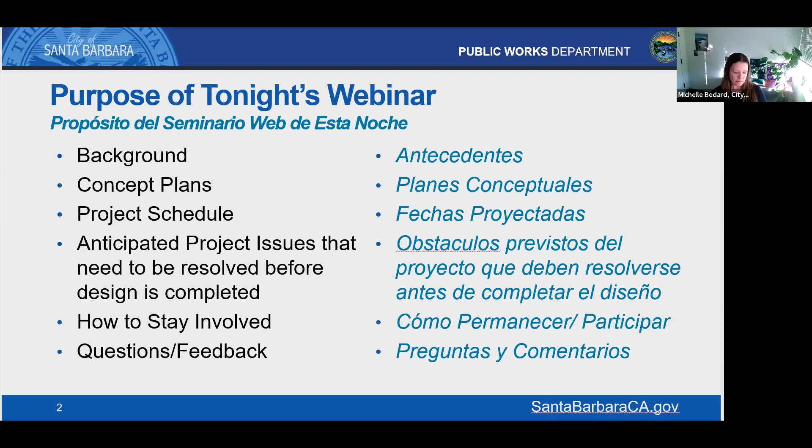Before we get into the current project, we want to provide a background for those who didn't participate in the planning effort back in 2019 and 2020.

The program began with a major maintenance effort, which was planned for Milpas Street. Due to the importance of Milpas Street, we wanted to identify other potential community desired changes to Milpas Street, and at the same time, staff performed a Vision Zero analysis to identify safety improvements.

After we did the initial outreach efforts, we returned with the proposed approaches that received community support at the approach workshop, focused on pedestrian safety enhancements, including safer crossings, enhanced street lighting at intersections, and tree management and sidewalk widening.

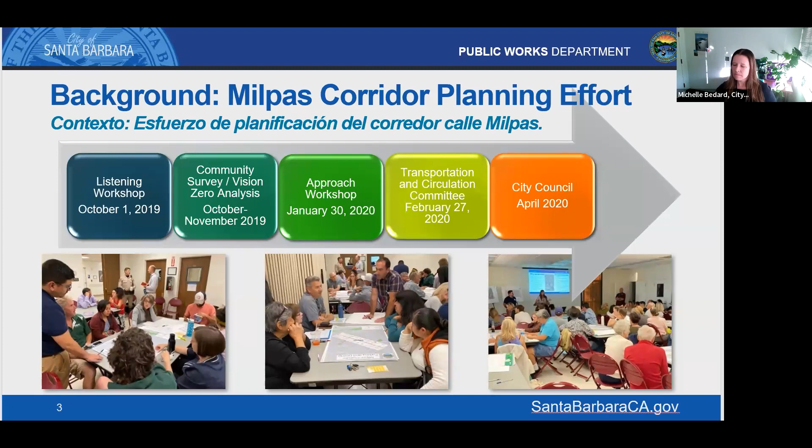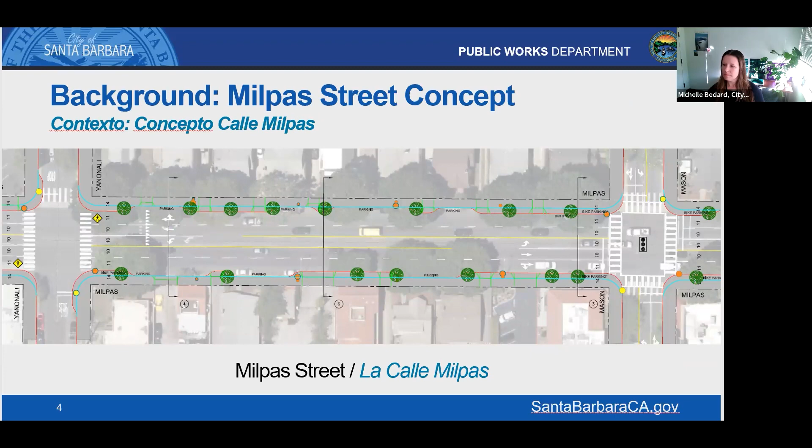For the original concept design, we did not receive grant funding for a project of this size and scope. We had to seek grant funding from the state's Active Transportation Program. This is an extremely competitive program, and while we have been awarded funding for past projects, unfortunately, we did not score well on this application.

After meetings with the state, we learned that the project was not transformative enough with multimodal transportation improvements. We were advised to rescope the project to a medium-sized project and focus on intersection safety, pedestrian comfort, and bus stops.

In 2023, we received $7.9 million in grant funding for the rescoped project, with $2 million in city matching monies for separate maintenance and repair funds.

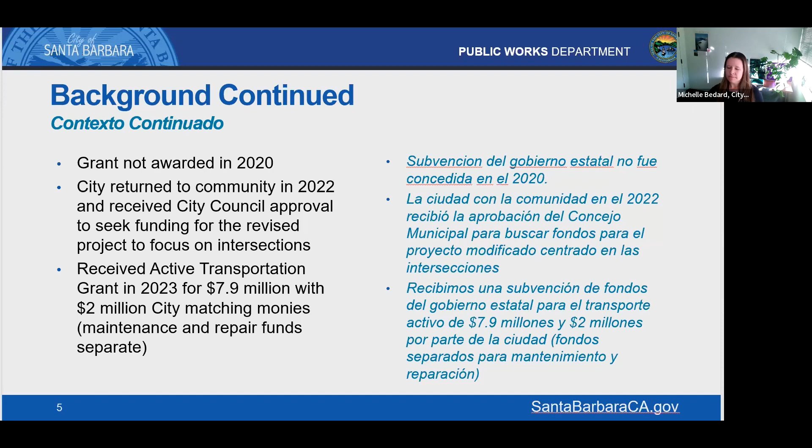So the grant funded project involves intersection safety, minor sidewalk widening, intersection lighting, and improved pedestrian flashers at Ortega and Yanonali streets.

And then the maintenance project involves repaving and mid-block sidewalk repairs, adding highly visible ladder-style crosswalks, doing better quality pavement markings, and adding ADA accessible improvements.

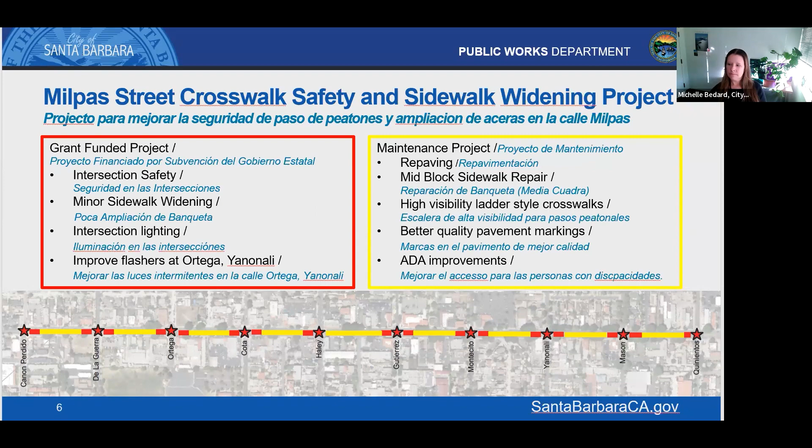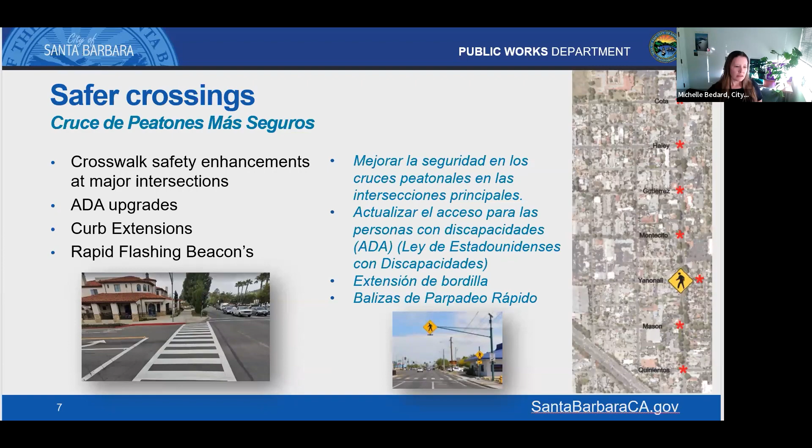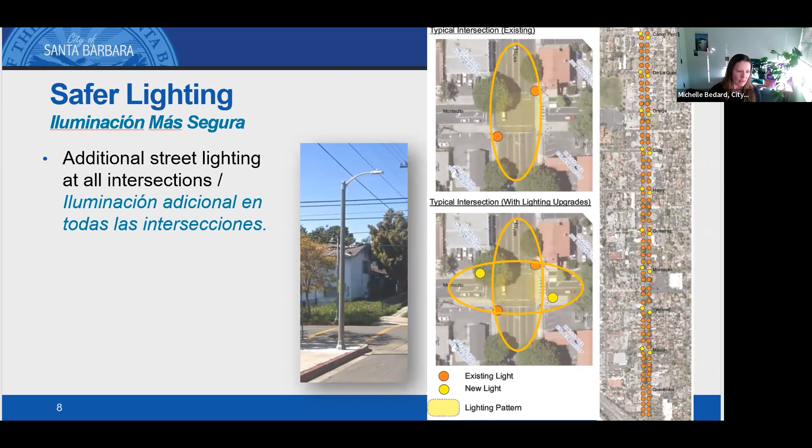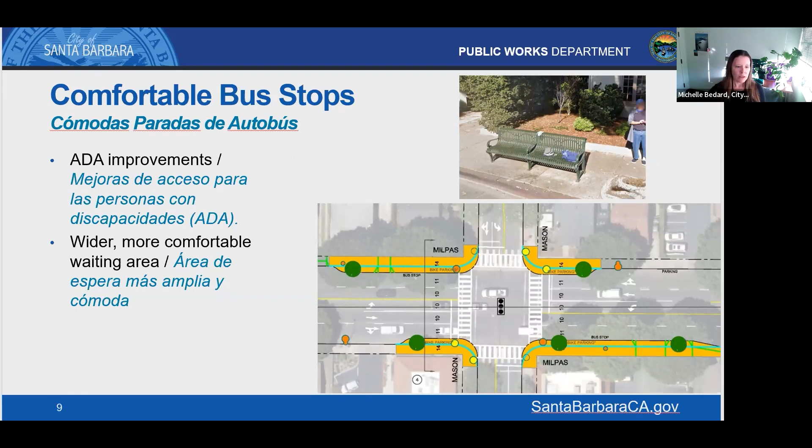Next, we will go through each of the project intersections. The project begins at the intersection of North Milpas and Canon Perdido Streets, just a couple blocks before Santa Barbara High School.

At this intersection, the focus is to widen the sidewalk at the southwest corner, between approximately the aggressive soccer retail shop at the corner of Canon Perdido and Milpas, and the Taco Bell. The blue line here is the existing curb line, and this is the area of added widened sidewalks. You'll see there's a bus stop in this location, and this would add additional sidewalk to enhance that bus stop experience.

In this image, you'll also see that each of the intersections will include new ladder style crosswalks, and again the addition of two streetlights at both of these corners.

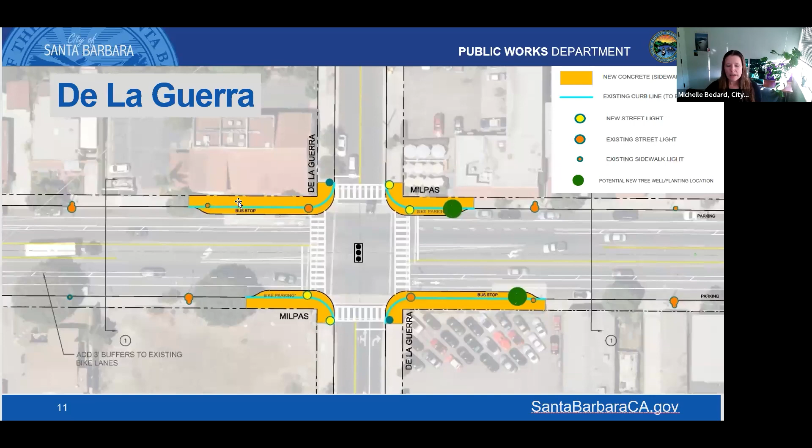At the De La Guerra intersection, at Milpas and De La Guerra, the bottom right here is Milpas Motors, and across the street is the restaurant The Shop. The project scope includes curb extensions and dual directional ramps at each corner of the intersection. Again, the existing blue line is the existing curb line, and the orange is the area of widened sidewalks at the corners.

The project will also include new ADA push buttons, new street lighting, new traffic signal poles for push button mounting, and add buffers to existing bike lanes, with potential to add bike parking within the curb extensions, and again the new ladder crosswalks with leading pedestrian intervals.

Moving on to the intersection at Milpas and Ortega Streets, the Capital Hardware site, you'll see the existing crosswalk median on the north end of the intersection with rapid flashing beacons. For this intersection, we will also be adding a new median at the south end of the intersection with pedestrian flashers as well.

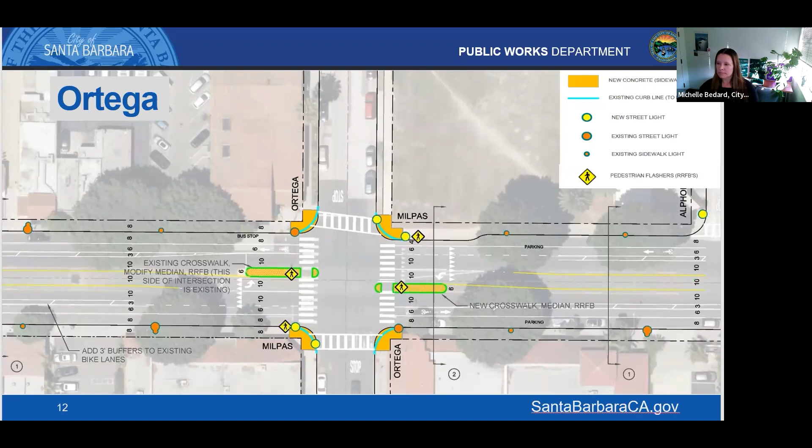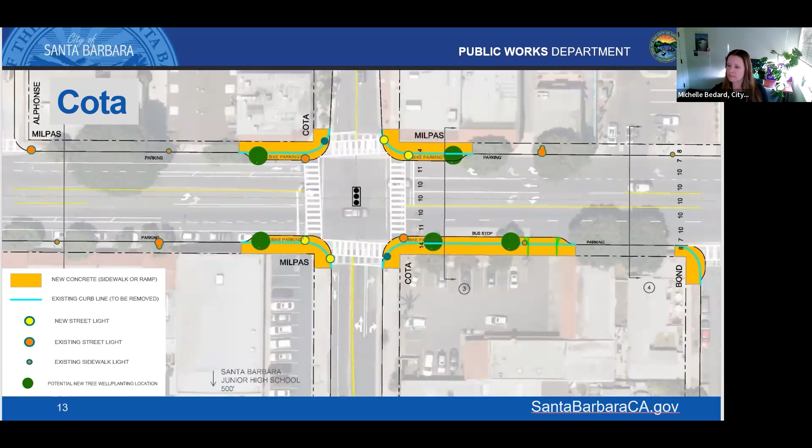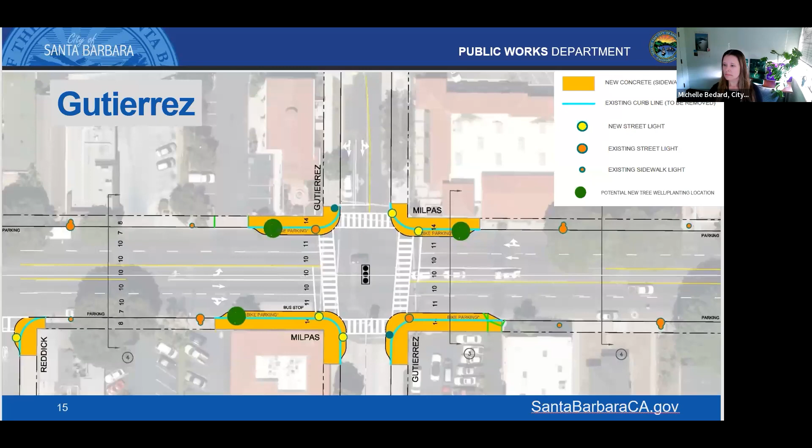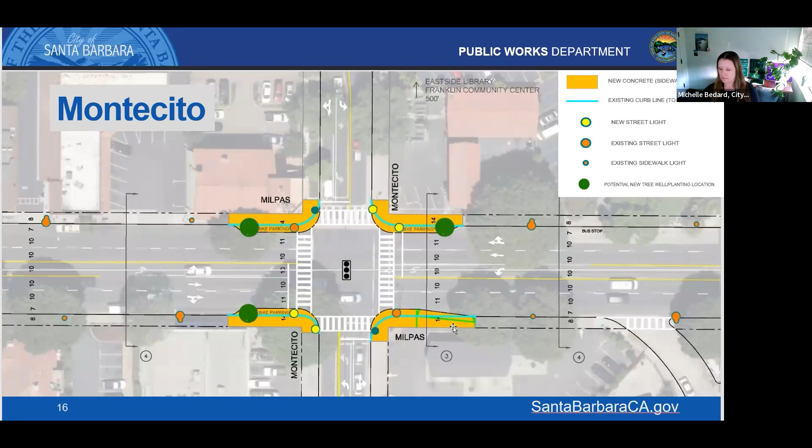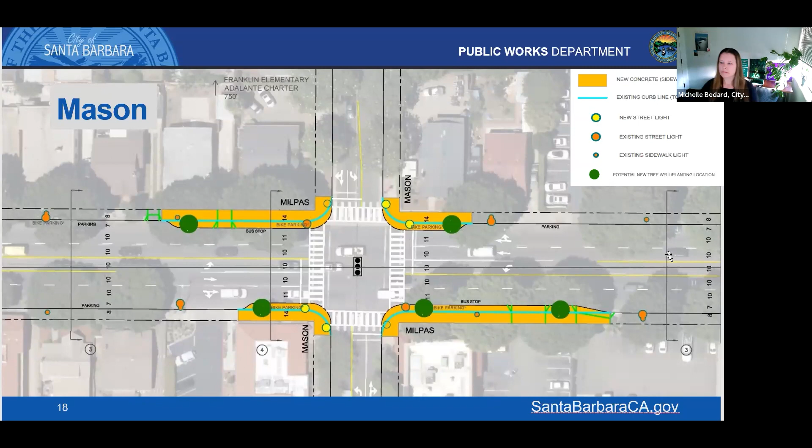At Milpas and Quinientos Street, the focus of this project will be the north end of the intersection with 2 new curb extensions, bike parking, new potential trees, and ladder style crosswalks with leading pedestrian intervals.

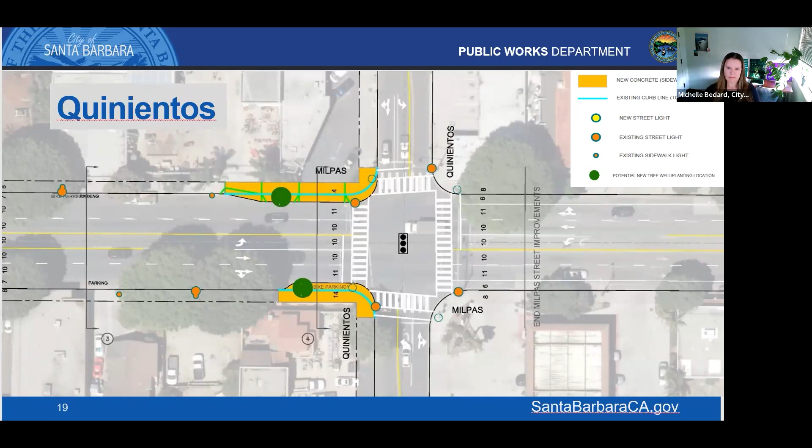In the original outreach meetings, there was expressed interest to improve crossings within the Milpas roundabout. This is a Caltrans operated intersection. However, we are studying the feasibility to add rapid flashing beacons in the grant application.

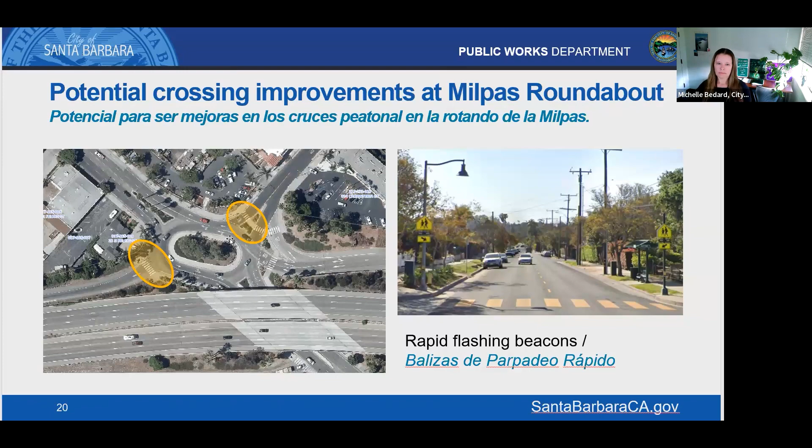Just to briefly discuss the project schedule for the grant application, this is an estimated timeline with next steps beginning with seeking design consultants and moving forward with design plans anticipated in 2023 to 2025, with potential estimate to have construction begin in spring of 2027 to fall of 2028. There is a potential to expedite this design phase, but that will depend upon how quickly we can work on the issues with the community and the technical experts.

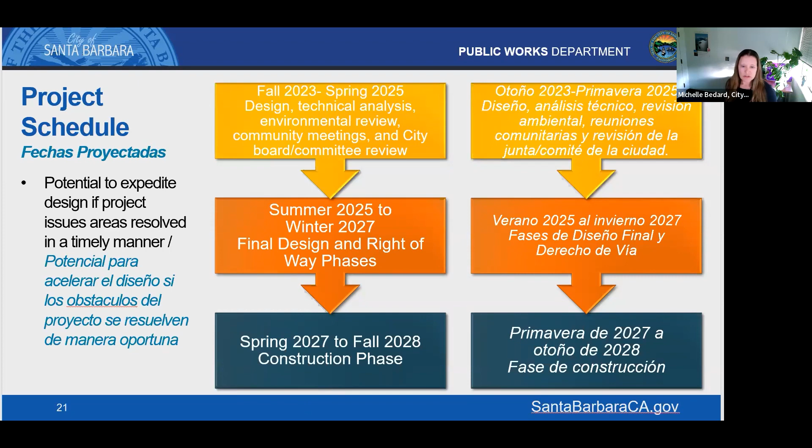As mentioned earlier in the presentation, one of the issues for study is to discuss the existing ficus trees on Milpas Street, which unfortunately are too large for the available space and causing ongoing maintenance issues. We are working with the city arborist and technical consultants for tree analysis and potential for accessibility improvements. We anticipate some tree removal and replacement with different tree canopy species over time.

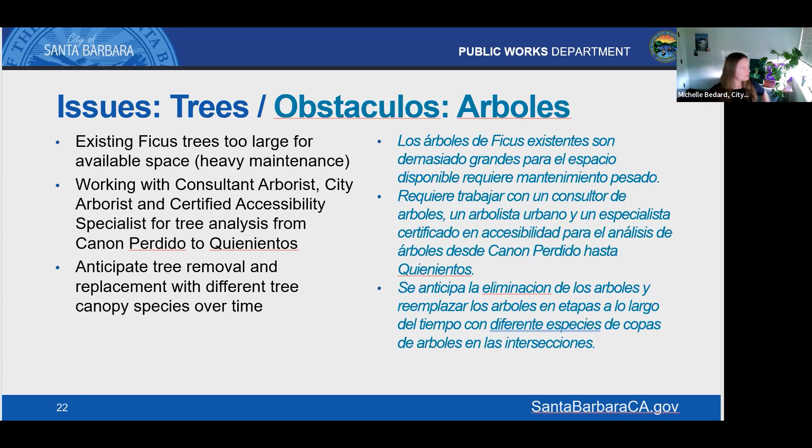Other issues involve sidewalks. As you may have noticed in September, we began some maintenance repairs. Sidewalks is another study item. Major sidewalk repairs will occur between the intersections. Staff is working with accessibility specialists to determine accessibility improvements. As mentioned earlier in the funding, this part of the project is funded by the city matched monies.

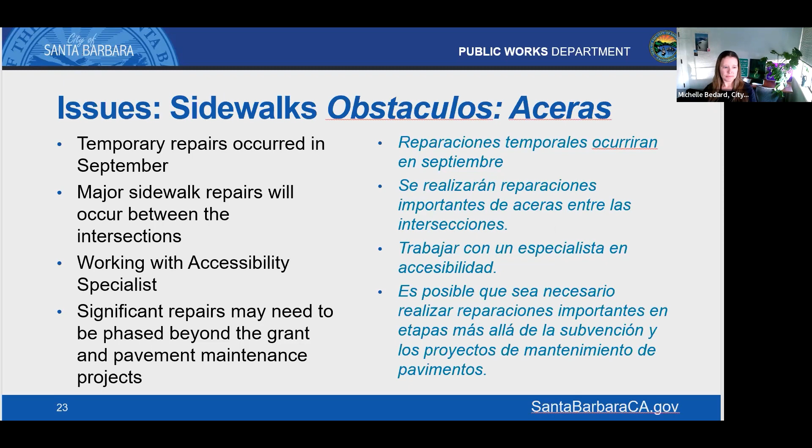So just to conclude the presentation, really the next steps, how to stay involved. We would love for you to attend community meetings, attend city committee and board meetings, and attend city council meetings as we move forward in this project.

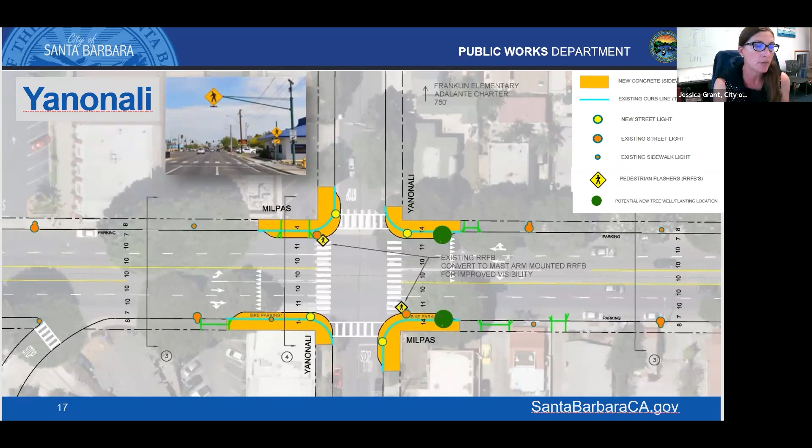Great, thank you, Derek. Let's go to the intersection of Haley and Milpas, Michelle. And this is a comment that says the left turn restrictions on Haley and Milpas are not often observed. Will that restriction be enhanced?

There's not much more we can do to enhance it other than appropriate signs. That's getting into enforcement of traffic laws and making sure there's adherence to traffic laws. I think it would be most appropriate to have somebody from the police department address that question.

This comment is great to hear, adding buffers to the bike lanes from Canon Perdido to Cota. Are any travel lane width modifications necessary for that, or is there enough space already without the need for travel lane modifications?

Why don't you go ahead, Michelle, and go to, I guess we could go to Canon Perdido and Milpas, as one of the cross sections.

Right now the center turn lane on Milpas Street is quite wide, and so in order to get enough room for a 2 or 3 foot buffer, we would likely steal a few feet from that center turn lane.

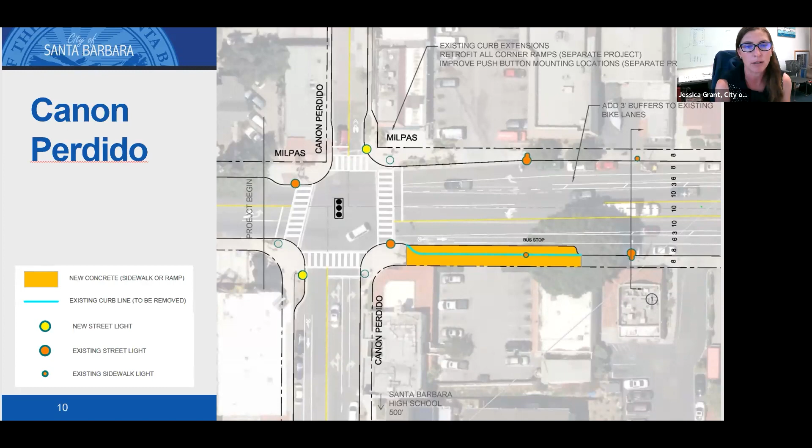I think, Derek, you had a similar response earlier to that, but let's go ahead and reiterate what we heard from the community in earlier workshops related to this project and the Milpas corridor. As far as bike lanes on Milpas, what we heard from the community a few years ago is Cota is the right place to begin and end the bike lane.

The context of the question a few years ago was we were curious if the community wanted to explore extending the bike lane down to Haley Street so that it would tie in with the existing bike lane on Haley Street that goes from downtown over to Alisos Street. But again, we heard that Cota was the sweet spot. Happy to revisit that if there's interest from the community, but that's just what we heard a few years ago.

As far as the Cota Street bike lane and east-west routes, we recently put in a bike lane on Ortega Street from Chapala Street over to about Ortega Park. Obviously Ortega doesn't continue all the way to Milpas Street because it runs into the junior high property. But that is in place on Ortega Street, and there is the existing bike lane on Haley Street from Chapala over to Alisos.

And there are plans to again study that west corner of Haley and Milpas Street, just to see if we can improve the interaction between that heavy right turn movement and bike movements that might be heading over towards Alisos Street.